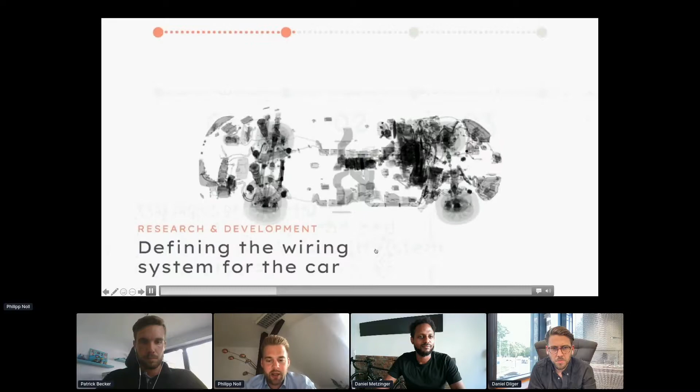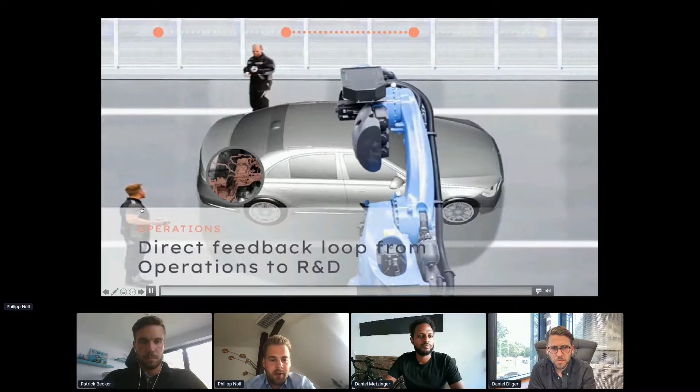You see the research development defining the wiring, assembling and ensuring the functionality of the car. You see the complexity of this enormous wiring harness in an S-class, and seeing directly feedback in the operations to the R&D and then in the after sales as well.

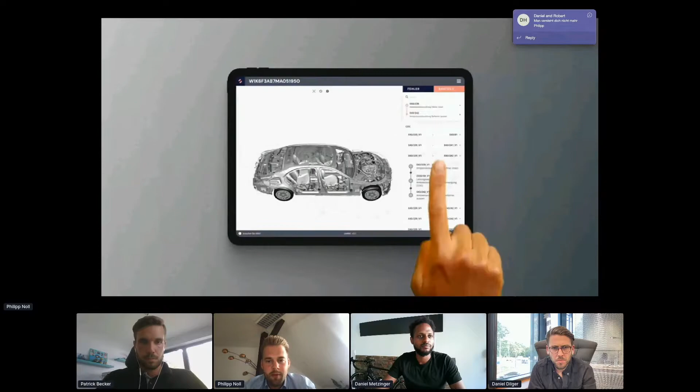Okay, so a little introduction so that you know where we are. In the topic of electrical communication, that means all the cables, all the wiring in the car. And the next one is the challenges from today, and I want to give over to Patrick from Mercedes-Benz.

Yes, the introduction video shows us the complexness of the vehicle wiring system in our cars today. And in the last years, we noticed that the challenges in the production area are changing more and more.

While vehicle assembly in the past mainly consisted of mechanical work steps, today the EE topics are more and more in focus. The complexity of the EE systems in the cars increases, and with it the demands for information about the systems and the connections in production.

Here we can see more functionality coming into the plants by an increasing count of EE components, and we get a higher degree of cross-linking. The data sent over the buses is higher than in recent years. Another challenge is handling the high vehicle variance.

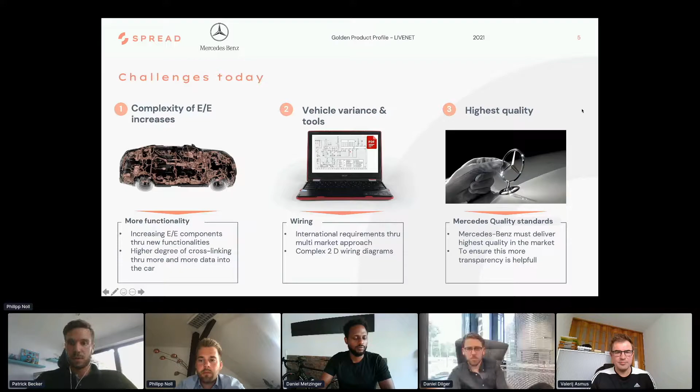Okay, thanks. I'm trying one more time. Can you hear me now? Okay, yes, great.

I'm Valerij, and I'm in MBC strategy. In my last job as lead of MBC data analytics and AI strategy, we found out we have a lot of know-how in our area from MBC.

We have information and know-how on product creation of our product in R&D. We have know-how in operations, in production of our car, and we have a lot of information and know-how from sales and after-sales. The idea was how we can bring all this information together, nearby on our product.

It was born to develop a product in which we can bring information from all areas together and share this information with areas. Our first use case was in operations, and Patrick can explain how the information is shared with our shop floor colleagues.

As Valerij explained, together with Spread and their platform, we created an application which helps us bring the EE data into the Factory 56. We created a digital twin which collects many necessary informations. The base for the visualization are the 3D data, and the user can get all relevant information he needs.

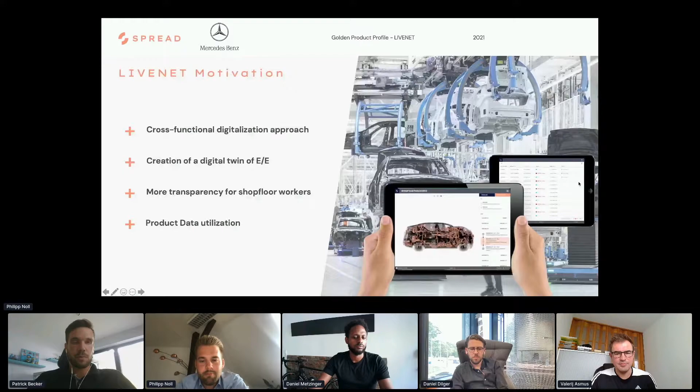Now Philipp will explain on the next slide the ideas behind the Spread platform. Yesterday we had a pilot talk where we discussed a little bit about our purpose and our motivation, what we're doing here.

In the end, we transform data into new insights, and we start mainly with the product data, which came from the R&D sector. In this case, it came from the EE colleagues, like Daniel Metzinger and co. We take this information, understand it like an engineer, and bring the insights into our platform.

Yeah, so this is in the middle, so our platform. And based on this, we have to ensure that it's easy to understand, and then we have to spread this information to the people who need that. In this case, there were the workers on the shop floor directly on the new S-Class production of Factory 56 in Sindelfingen.

Maybe I can say something about this approach, because we are focusing mainly on the user requirements, and we have to fulfill this, because otherwise they will not use our software products. And we had the pressure of 100 days, so starting with the idea and going to the users, then developing in 100 days an application able to run in the factory. This was our approach.

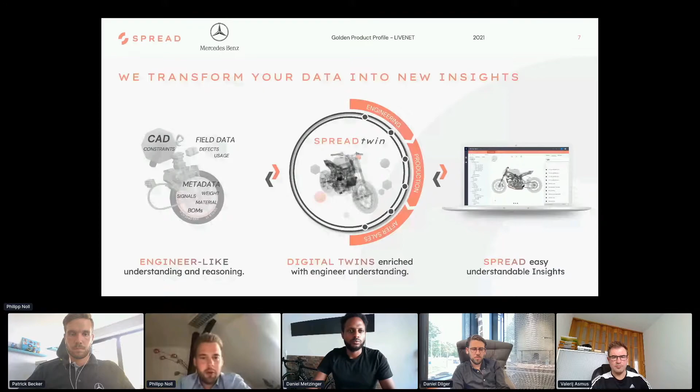So, a rapid blueprint, I would say. We started with the definition, with a design thinking process where we interviewed and worked together in collaboration with the end users. In this case, we were in Bremen and in Sindelfingen to get this information from the shop floor workers. After that, we developed in two-week sprints together with Mercedes, and now we are in the usage phase, checking the needs and having iterations with the users.

And that was possible through good cooperation with Mercedes, together with all the colleagues from strategy, IT, production, shop floor, R&D, whatever. So that made it possible to develop this case, which we want to show you now in a little video from the shop floor, done in 100 days.

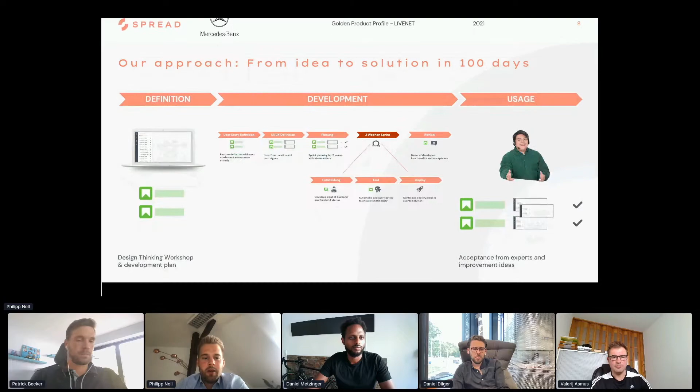So, now this is what we have done. I think you are not really able to hear the sound, but you see the title here and some feedback from the users.

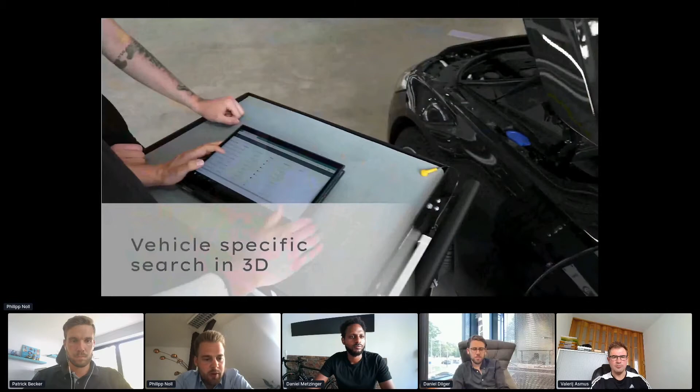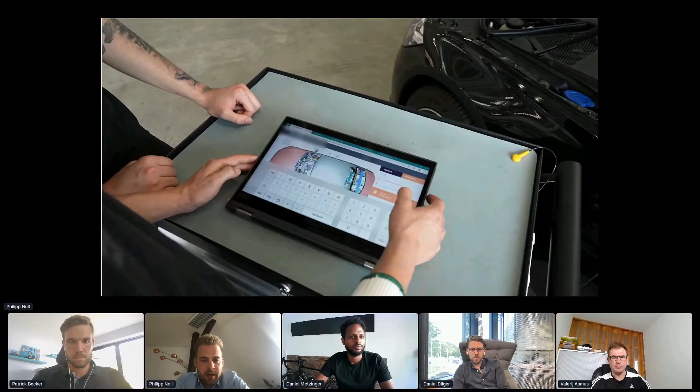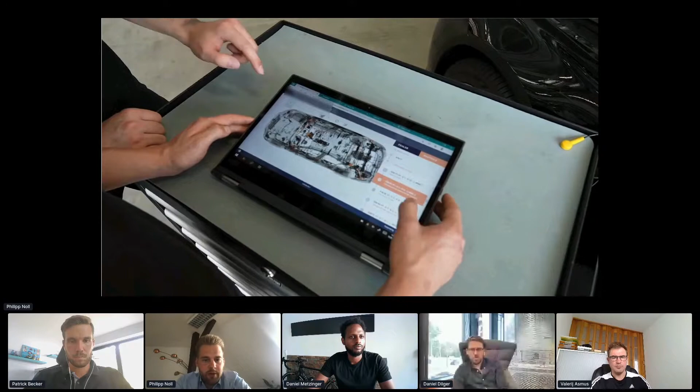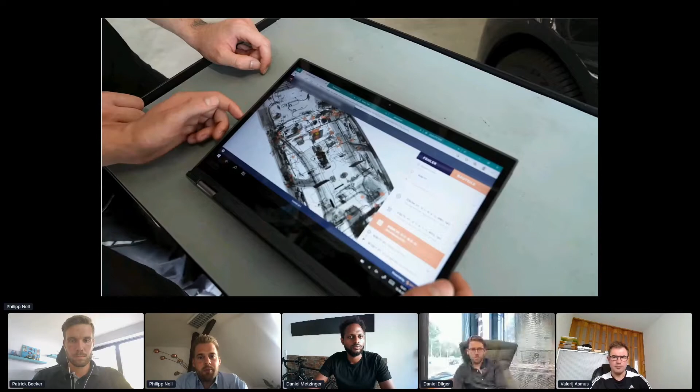So this is what Patrick mentioned. You can search for a car and find it directly. You have the VIN-specific car on the screen, on a tablet in this case, and then you can analyze the whole communication in this car, finding all the components, all the plugs and so on, making it understandable. As Patrick mentioned, today we are coming from 2D highly complex PDFs, and we beamed the workers into the 3D with all the information they need.

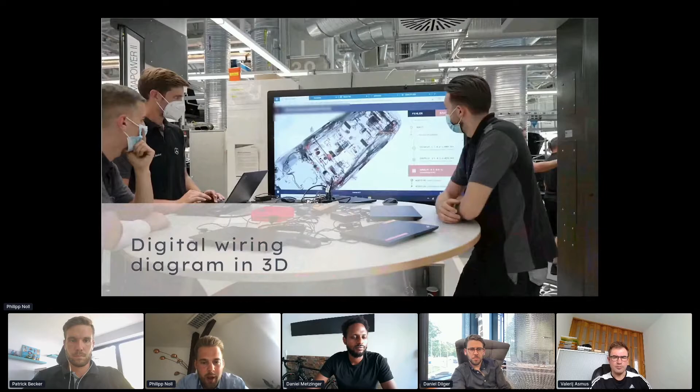Yeah, you can see the screen, so of the whole wiring in 3D, and this is our colleague Patrick on the screen, discussing with the workers. Just the intelligent analysis of the electrical communication as a network, as you can see, also in LiveNet - it's called LiveNet.

I will give you a bit more information later about what I've said here, because that's me.

Yeah, so that was our video with some feedback from the users, and now we're coming to the outcome. You saw that the guys are really able to use the software on the shop floor. We deployed this on the Mercedes-Benz cloud, and now I want to give over to Patrick, Daniel, and Valerij for the added value and the outcome for Mercedes-Benz.

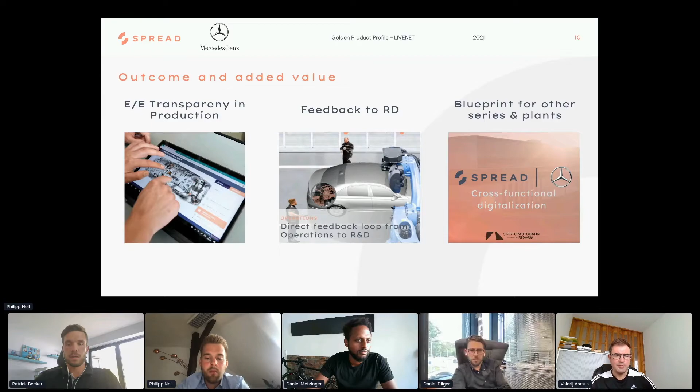Patrick, you're muted. Patrick, you're still muted. Sorry, thank you. Yes, from the operations perspective, still muted. No, we can hear you. Can you hear me?

Okay, yes, from the operations perspective, we bring new transparency into the EE environment, and in conclusion, we create a database which brings the information directly to the guys on the shop floor. Now they can get the information quickly and exactly tailored for their issue, on a central and digital platform, the platform from Spread. I think that's the main point from the operations perspective.

And now Daniel will show us some points from the development side. Okay, thank you Patrick. I will pick up on Patrick's point about cross-functional data utilization. Normally the R&D department are the owners of the 3D data, and what is our approach? We want to create target-oriented information for users. So what would that mean?

We want to have an enrichment of the 3D data, which implements the electrological information, or for example, the position of the component, or other process relevant data. And as Philipp has yesterday already mentioned, data is the new oil and accessible information is the new gold.